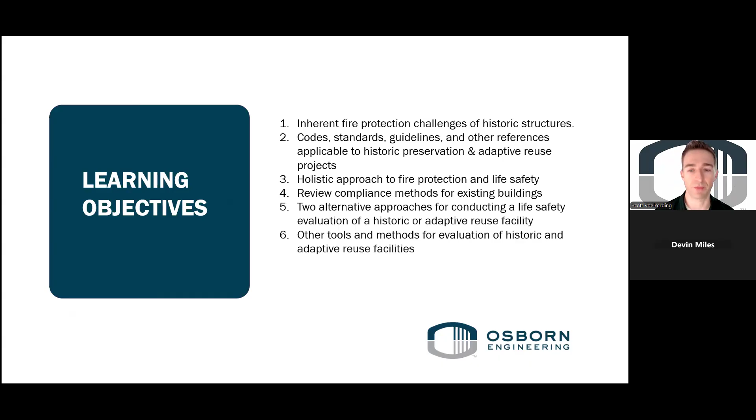So a couple of learning objectives today. We're going to talk about some of the inherent fire protection challenges for historic structures that we don't deal with in other project types. There are many codes, standards, and guidelines that govern the work, and we'll touch on those, as well as how to take a holistic approach to fire protection and life safety and all the different things that go into the level of risk. We're going to review different compliance methods for existing buildings that are largely driven by the building code. We've got a couple case studies to share on how to deploy some of those tools, and then some additional tools we can use beyond the codes and standards as we get into performance-based design and more specialty type services and work.

The inherent fire protection challenges of historic structures: in some cases, these are hard to replace, not only the buildings but the contents inside, and of course preservation of cultural heritage is also a big part of that. But these facilities also have inherent higher fire risk and additional challenges for life safety, due in large part to codes and standards development that lags. We learn a lot of our lessons from fire history, and a lot of times we'll have a big fire and then it'll take 3, 6, 9 years to get those lessons learned into the codes and standards we use for development of the building.

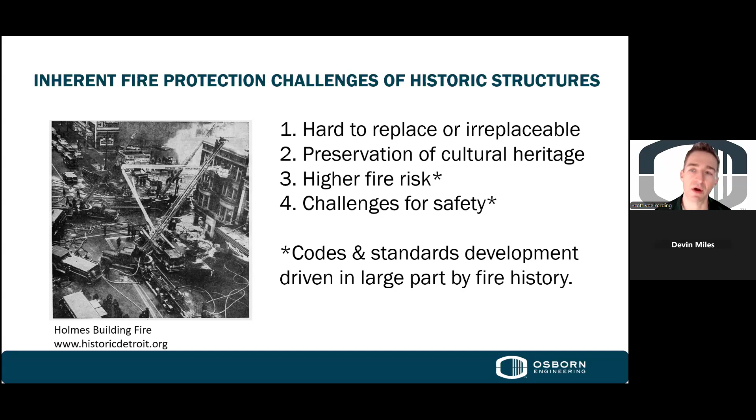So as we're looking at old buildings, whether it's an adaptive reuse project or an old building for a renovation or addition project, we've got to keep in mind that the buildings may have been built 70, 80, 90 years ago when there was little to no codes. Just a brief ICC history: almost all jurisdictions now in the U.S. use some form of the ICC.

There are exceptions to this, but states take those codes and modify them. Most jurisdictions are using a national model-based code, and there were three at one point that were all condensed down into the ICC in the late 90s.

The original International Building Code was published in 2000. The existing building code, which we'll be talking about today, was published in 2003. And these are revised on 3-year cycles.

As I mentioned, states will take those and modify them, and they don't always pick up every cycle. So here in Ohio, we just moved from the 2017 edition up to the 2024 edition, and that's not atypical as you move throughout the country. The modifications to those codes can be significant.

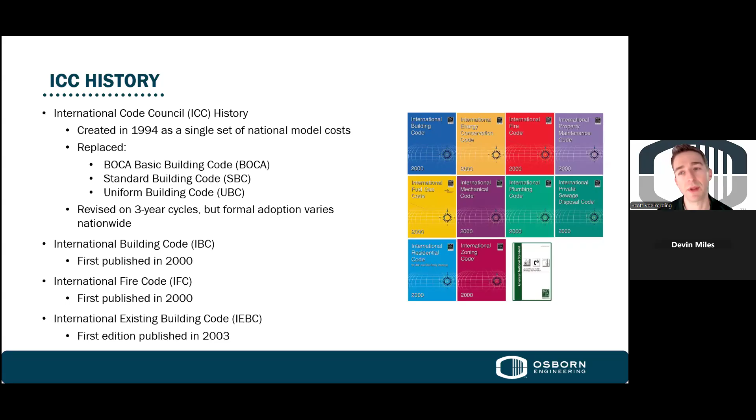So here in Ohio, just a brief review of code history. 1911 is when there was any type of legislature for construction. As we moved into the 50s, they developed the Board of Building Standard, an Ohio building code—not the same Ohio building code that we know today, but one specific to Ohio.

Ohio didn't really get on a national platform until the late 70s, after the OBOA requested that BBS adopt that model building code. In 1979, OBBC finally adopted a version of the BOCA National Building and Mechanical Model Codes. There was a little bit of a grace period to get people adapted, but since the late 70s we have been on these national-based codes.

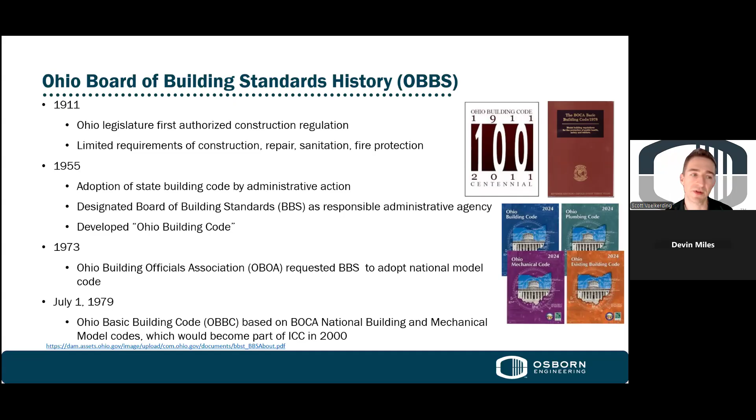But there again, if you're looking at buildings that were built in the 30s, 40s, and 50s, there was very little regulation at the time, and that's inherently part of the problem.

So historic buildings—what is a historic building? The takeaway on this slide is it depends on what code you're in. We're going to be talking a lot about navigating through codes and definitions, and the definitions are important, including that for historic building.

They're going to change depending on not only the code book that you're in, but the jurisdiction, and even sometimes within the code itself. If you're dealing with flood hazard areas, that's going to have a little bit different definition for historic building for that application.

And this has been a problem. I pulled this note out of the NBS from 1976. The NBS was the National Bureau of Standards.

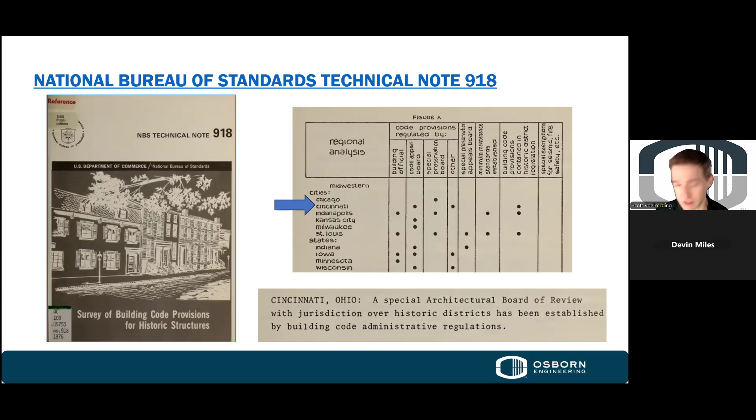Since this is an Ohio-based presentation, I thought it was interesting that in the Midwest, Cincinnati was one of the pioneers for historic building codes—defining historic building and what it means, and adopting and generating some regulations for that.

As I mentioned, the definitions are really important because they're not consistent amongst the codes. Even the ICC definition is taken and modified by the states, and Ohio's done that with many terms. I've just pulled out a couple of the ones that we use relatively regularly that impact the work that we're doing—even things like existing building.

Ohio has tied existing building to a certificate of occupancy, or one that could get a certificate of occupancy. The one that's in the IEBC is broader—an existing building prior to the date of adoption—but Ohio has linked it to a certificate of occupancy or one that could get a certificate of occupancy.

Even things like maintenance and repairs—I was working with a client that had dry systems that were corroding at their facilities across the United States, and a lot of the sprinkler contractors were trying to do entire replacements of these systems as a repair.

So again, these terms are defined by the various building codes and fire codes, and it's really important that we're defining the scope, what it is, and the categorization of the project. We're going to be talking about existing building code, and that becomes critical because that starts to get the roadmap to what chapters govern the scope of your project.

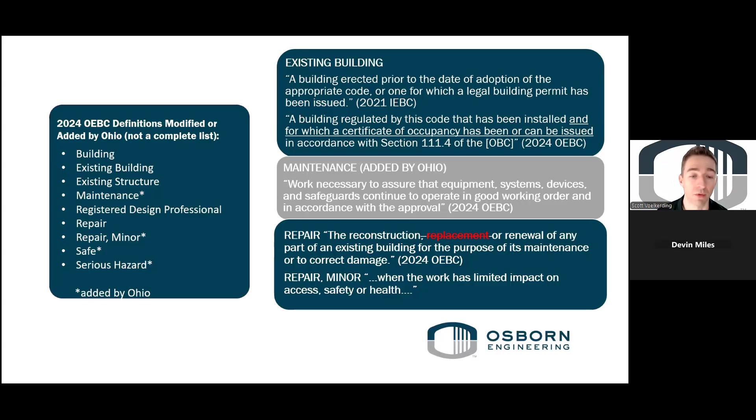On the left side of the screen, I pulled out a couple of definitions that Ohio has either modified, added to, or created, and it's important to familiarize yourselves with those.

In terms of a holistic fire protection approach—a lot of times, certainly in the AE industry, people mention fire protection and they're referring to the sprinkler drawings, which are oftentimes a delegated design and a high-level approach of the sprinklers only. But as we start to look into the codes, and certainly old historic buildings and adaptive reuse, we really want to be mindful that there's a lot more going on to fire protection and the level of risk than whether or not a building has a sprinkler system.

And even though the evidence of fire sprinkler systems is overwhelming in terms of the benefits and the trade-offs, you will see that through the codes and standards, with exceptions and whatnot.

When we're taking a look at a building, either for a change of occupancy, adaptive reuse, or in the case of a historic building, we need to look at all these different systems.

What are they? There's the passive systems, like firewalls, fire doors, and fire stopping. The active systems are the sprinkler and alarm systems, and sometimes smoke control systems for atriums or pressurized stairwells and elevators. These are all active systems that, based on detection of smoke, will turn on and activate.

And then you've got the life safety measures as well that also have to be taken into consideration. A lot of times these fall on the owner side, but emergency evacuation plans, fire safety plans, occupant training, fire drills—we need to look at all those things when looking at the safety of a building.

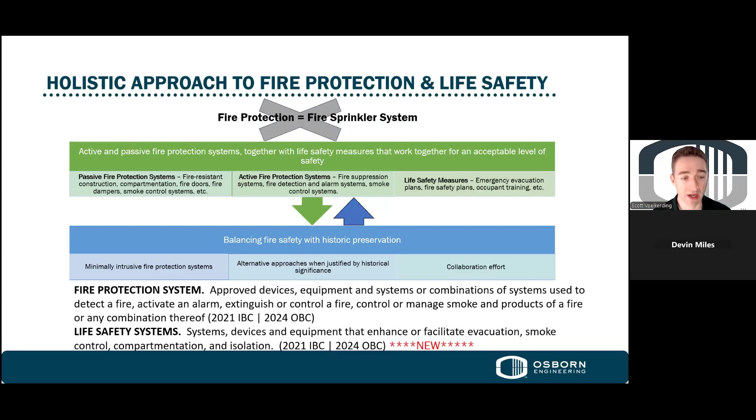Even terms like fire protection and life safety systems are defined by the building code. And it's important to note that, as with the balance, it's much more than a sprinkler or alarm system. There's a lot going on in this, but I think it's important because, as we mentioned, the states will often modify the codes, and Ohio has done that.

Equally important are all the reference standards back in Chapter 35. There's a very frequent mistake made in design: using the wrong book. Part of the problem is NFPA has so many codes and standards—hundreds that are published.

And oftentimes, in fact most of the time, you're not using the most readily available standard, the most recently published standard. The codes are always on a delay, and in Ohio, we just went from 2017 to 2024.

These things are formally adopted at the legislative level. So in this case, we might be looking at NFPA standards that aren't the newest, but these are the ones that are legally applied to the project.

So it is critical on every project that we establish what the model building and fire codes are and all of the reference standards. This is just a snippet on the right-hand side of your screen for NFPA. That list is very long.

There's also ASME. Anytime there's any other standard or reference in the building code, if you flip back to Chapter 35, it will tell you what edition is applicable to the project and also the specific code reference where it's cited, so you can back that up.

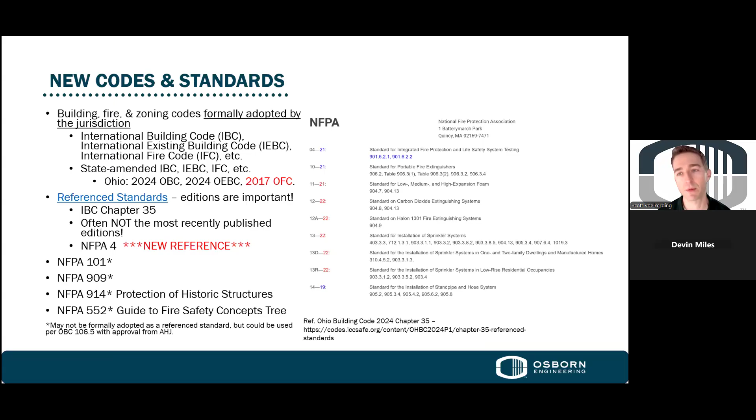NFPA 4 is a big one for us—I've got a slide on that coming up, but that's new to Ohio. And then there's some other codes we'll talk about that might not be a direct reference: NFPA 101, 909, 914 for historic structures. Although those are not formally adopted, I can show you some ways to get to those.

So NFPA 4 has been around for a couple of code cycles. Ohio has finally adopted it. Really, the nature of this standard comes from that holistic approach again.

If you've got a sprinkler system being designed by a plumbing engineer, a fire alarm system by an electrical engineer, and a smoke control system by a mechanical engineer, a lot of times these things do not get integrated and become problematic in the field for testing and construction. The whole point of this standard is to try to get that all worked out with an integrated testing plan.

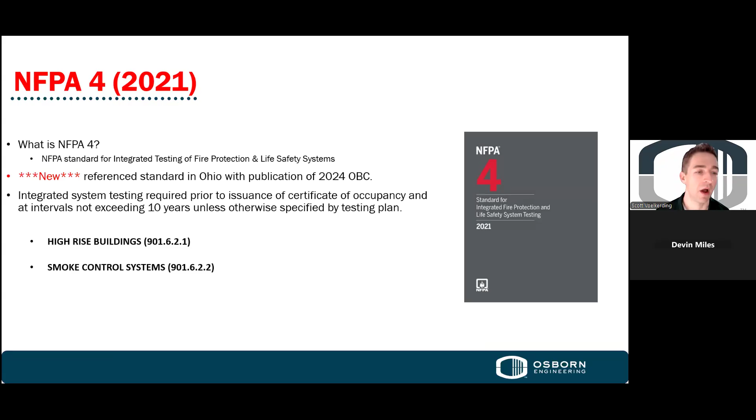At least in this case for high-rise and smoke control systems, all these systems really work together to create the level of safety. The smoke control system is only as good as the detection that's going to turn it on. So that's really kind of at the heart of this standard. Ohio finally adopted the 2021 edition of NFPA 4 for high-rise buildings and smoke control systems.

With the reference standards comes a gap, since Ohio skipped an ICC code cycle. So a lot of these reference standards are going from the 2016 editions all the way up to the 2022 editions, and there's been a lot of changes through NFPA. I'll just highlight a few of the bigger ones.

We've been using air venting valves on wet systems since the 2016 edition. But I bring this up because on historic buildings and older buildings slated for adaptive reuse, some of these things you're not going to find. And if you're replacing a sprinkler system or adding to one, the rules have changed significantly since original construction.

Dry and pre-action systems no longer have requirements for galvanized pipe. In fact, the industry has moved away from that entirely and gone back to black steel pipe, preferably with nitrogen generators. There's been a lot of issues with corrosion in dry and pre-action systems to be aware of. So if you're dealing with an old structure and trying to revamp or replace an existing system, it's really important to look at where the industry has gone, because there might be changes in material type, system type, and design metrics that need to be looked at.

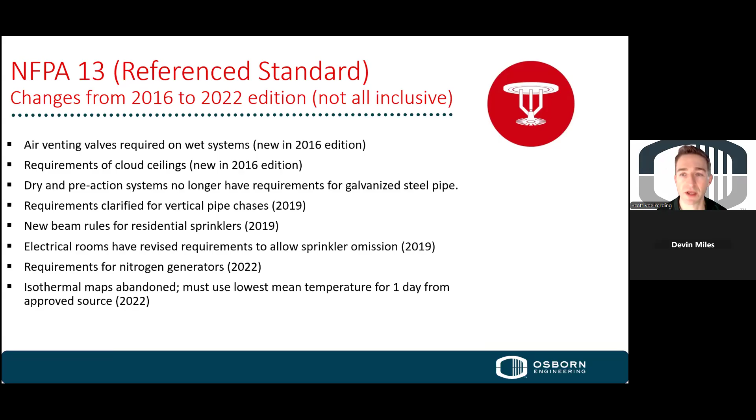Rules for electrical rooms have changed, beam rules too. The isothermal maps have been abandoned, so certainly where Ohio gets freezing temperatures throughout the state, in certain cases when dealing with dry systems, we need to take a look at that as well.

A couple changes from NFPA 20 - it's a big deal whether it's an electric or diesel driven pump. Everything from the fuel hazards associated with the diesel pump to the room space and ventilation requirements. In an older building, you might have a pump that's been around for 40, 50 years that you're going to retrofit or reuse, and the codes have changed immensely.

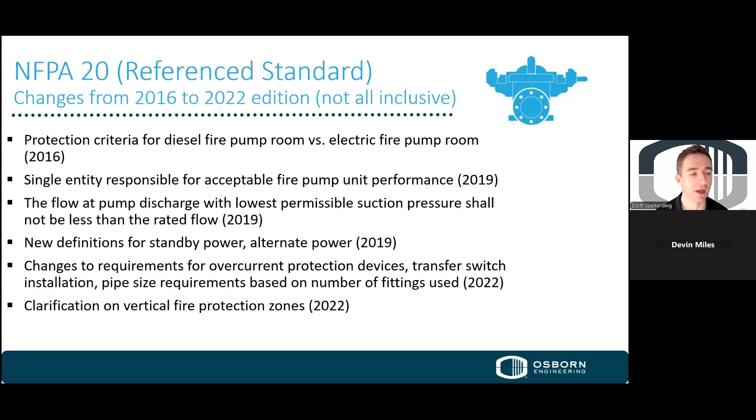A lot of old historic buildings don't even have pump room enclosures anymore, which has become something required in current and recent code cycles. So as we take a look at those pump assemblies, it's not just about the pump. As we get into NFPA 20, it'll talk about the room and everything required for a pump room and water service, and so on. Again, with older buildings, we're dealing with many code cycles of changes.

NFPA 72 has really come a long way just in the last 5 or 10 years. System survivability is a big deal - making sure your wiring and connections with fire alarm systems can sustain a fire, particularly in high-rise or healthcare occupancies. All the terms on system survivability have really come into the code in the last 10 to 15 years or so.

We're starting to talk about elevators and use of those for fire service, and to a lesser extent, occupant evacuation elevators. But with those big design changes in modern day buildings comes a bunch of code changes to make sure we can do that safely.

Areas of refuge requirements, carbon monoxide alarms have been another big topic within the last, I'd say, 5 to 10 years. This is really important with adaptive reuse, because we're changing office buildings to residential. You're always going to get into a requirement in residential now with fuel-fired appliances for carbon monoxide alarms. It just wasn't even a thought even 15, 20 years ago.

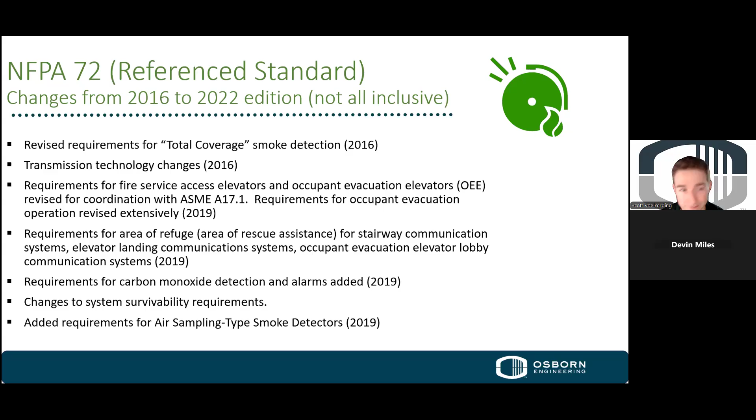Other references and guidelines beyond the codes - this preservation brief 51 is coming up on a year old now. This is an excellent document to navigate historic preservation. I'm not going to deep dive into this because Heritage Ohio has another webinar coming up in a couple weeks focused entirely on that. But if you haven't seen it, that's an excellent preservation brief. There's a whole series of briefs.

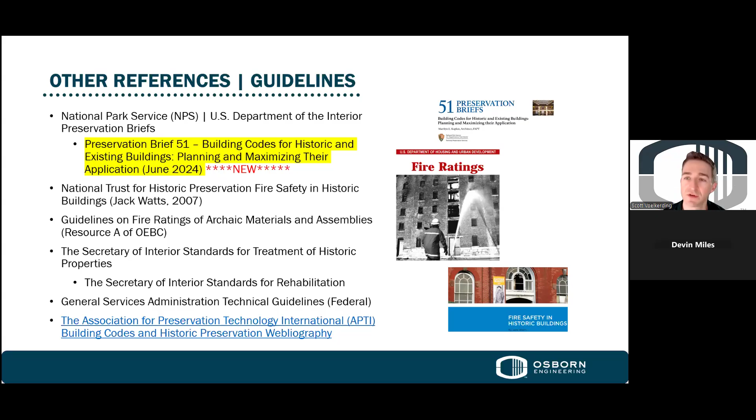They're working on one for wildfires as well. This is really good - you can get lost in the codes very easily if you're not used to working with them. These preservation briefs are written in a way that makes things easier to understand. National Trust has some good literature out there that approaches things a different way - we'll be talking about that in a bit. Secretary of Interior standards, GSA if you're in the federal space has a bunch of standards, and even the APT Webliography.

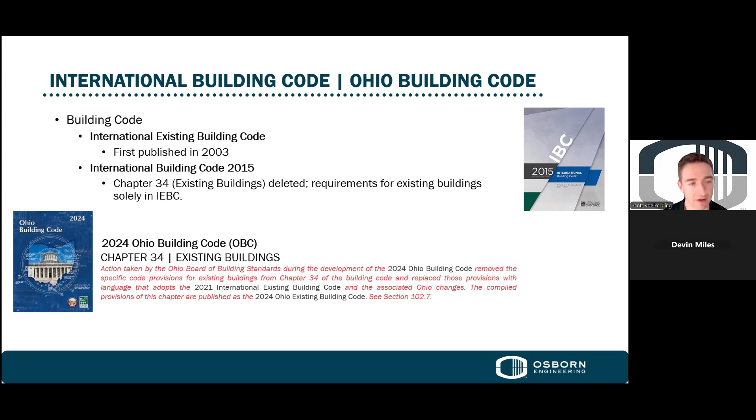So more specifically now in Ohio Building Code, the International Existing Building Code was published in 2003, but Ohio did not pick it up until this last code cycle. It's been a big change because we used to go to Chapter 34 for existing buildings, which is in the building code, which has now been deleted, and everything goes to existing building code. Some of that stuff has been preserved, and we'll talk about some of the performance-based pathways that is not new material, it's been relocated from 34 into the existing building code. But fundamentally, a big change for Ohio, because what was a short chapter is now an entire book of methodologies.

What it comes down to is, at least with the IEBC, there's 3 different compliance methods. One of the things that makes this stand out from other compliance methods is you can only choose one for the scope of your project, and once you pick one, you're kind of stuck with it. It's prescriptive, performance, and work area method. That's not to say if you have a large building broken up into several projects or different floors that you wouldn't be able to choose a compliance method based on those project scopes, but the way this is organized is a one path type organization.

It's worth noting that Ohio deleted an exception that's basically the grandfather rule. That's not to say that you can't—there are other places in the code, prescriptively in the prescriptive method, that allow you, if it's existing and you're not touching it, it can remain. But a lot of the language on that grandfathering stuff has been either reduced or made harder to use, because there's a lot more tools that we have now to be able to navigate some of these design challenges.

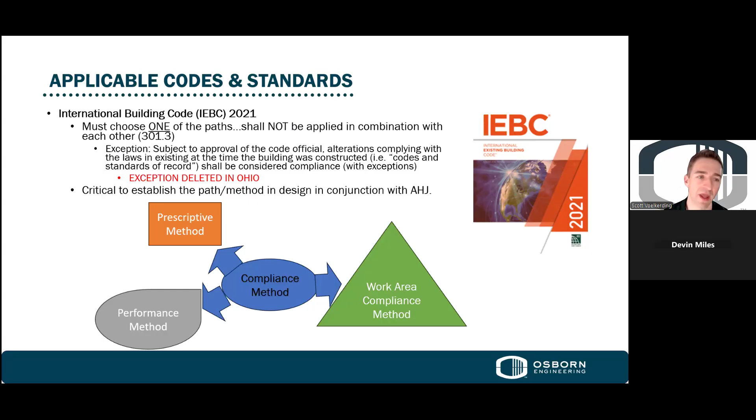So it might be tempting to open up the book, see Chapter 12 as historic buildings, jump right to historic buildings and start looking at project requirements, but that is only good for work area method. In fact, one of the things we're working on at the APT code committee now for this next ICC code cycle is trying to get all the requirements for historic buildings into a single chapter for all the compliance paths. I did just attend the hearings in Orlando a few weeks ago, and it looks like that might have some legs—there's a series of hearings needed to get that passed. Ohio wouldn't see it probably for another 3 to 6 years because we've just gone to this new code last March, but that's something that's in the works.

So as it stands now, your work area method is going to be Chapter 6 through 12, and that's solely the work area method. A change of occupancy is this—this is another one.

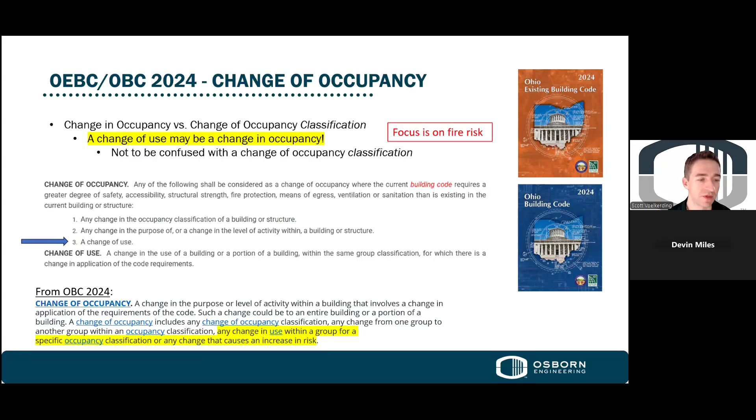It's important to know that a change of use is also a change of occupancy, and really the focus is on fire risk. It used to be that back in the old Chapter 34, well, I've got an A3 occupancy, we're not changing the occupancy classification, we're remaining A3—a lot of this stuff could remain. The existing building code drills down a little further, and we really need to take a look at the fire risk: is that A3 of the same occupant load, or do you still have to take a look at your number of egress doors and your occupant load counts? The focus really on an existing building is more about the change in the fire risk. Even by definition, a change of use is a change of occupancy. And in Ohio, they're calling out that a change of use group within that group, they're looking for the increase in fire risk from an assessment. So it's not as simple as saying, well, we've got a certificate of occupancy for A3, we're remaining A3—you've got to do a little bit deeper dive than that.

So now we're going to kind of walk through existing building codes. Before we do that, are there any questions so far on the code history—why we're doing this, or anything on code development for how we got here so far?

Any questions so far, Devin? Nope, no questions. All right, sounds good.

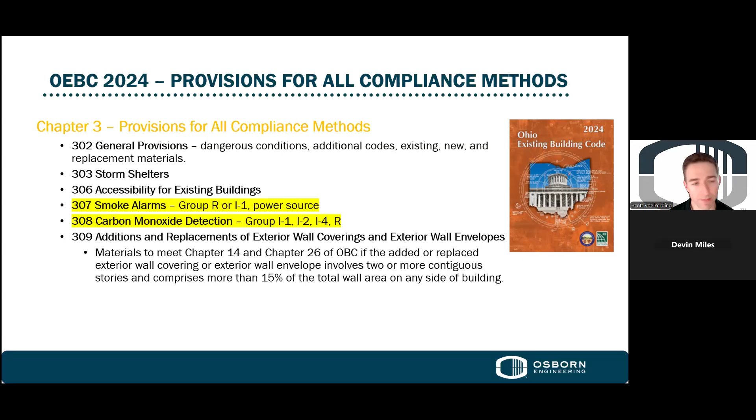We'll launch into provisions for all compliance methods. Again, these are for all the methods. I just highlighted a couple here again, smoke alarms and carbon monoxide detection. These are going to come up on anything that is a Group R or Group I occupancy, and we see that a lot with adaptive reuse with the trend of turning offices into residential. That's going to come up again on all compliance methods, regardless of what you choose.

Prescriptive method is probably the thing that we're most familiar with in Ohio. It's going through and bringing certain building elements up to code based on the nature of the work. But we're first going to categorize that into what we're doing, either as an addition, an alteration, or a change of occupancy. And then there are some exceptions for historic buildings that are covered in this chapter too. You're going to find yourself, if you do prescriptive method, going back to the Ohio Building Code for new installations and the scope of the project.

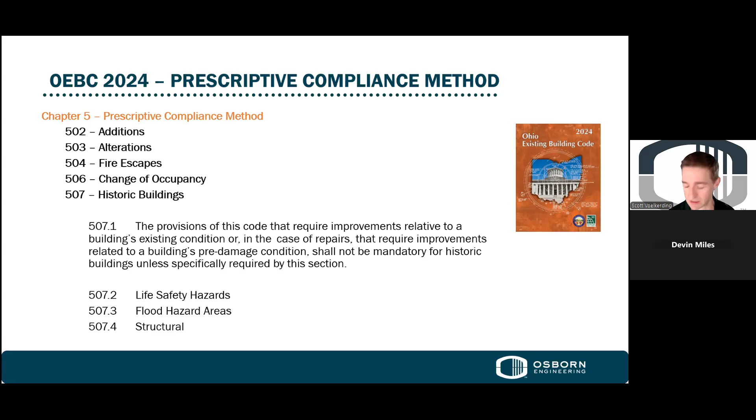Fire escapes, we're still using fire escapes in some cases in older buildings, so there's a chapter on that. This is the one where you'll be most likely sent back to OBC with some exceptions on historic buildings. And there again, the change of occupancy is based on the fire risk.

But within this prescriptive space, there's still some flexibility. So it's not as simple as saying that the existing stairs have to meet codes, and that's really kind of the point of this prescriptive based approach. There's some leniencies in here. I pulled out just a few examples: stairs, where the construction does not allow reduction in pitch or slope. Historic buildings often have a grand staircase that we want to keep, and the codes are going to let us keep that, provide some flexibility. Things on live loads, snow and wind loads, there's some leniency here on the old standards.

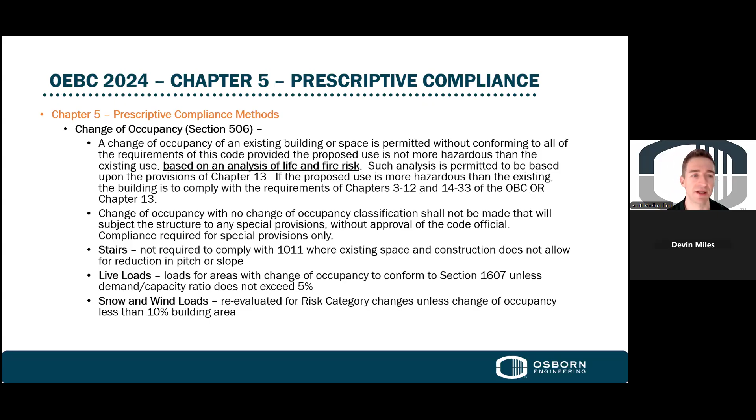There is a provision at the front that kind of guides you through whether or not these are retroactive or not. Not everything in this chapter is retroactive, but there are certain things, means of egress, smoke detectors, carbon monoxide detectors, I've mentioned those before. Those are all retroactive. But we use this regularly in our design work too, because the fire code is going to take over at their certificate of occupancy. It's important to note too that Ohio, while we've gone to 2024 versions of building code, existing building code, we're still in the 2017 edition of Ohio Fire Code.

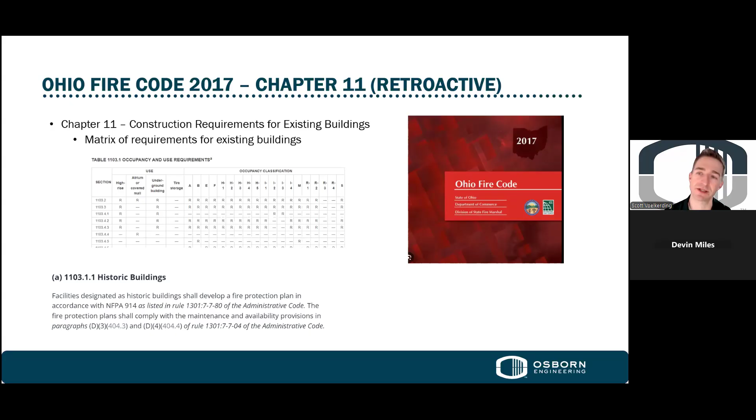And then on historic buildings here, this is one of the paths. I mentioned that NFPA 914 is not a reference standard in either the Ohio Building Code or existing building code, but this is one way you can get to it. The Ohio Fire Code does reference NFPA 914 for historic buildings at 1103.1.1. So that's just one example that I wanted to highlight, just because an NFPA standard is not referenced in the building code, here's a pathway to get to it if you need it.

We're going to shift gears to work area method now. Work area method, you're typically doing work in an isolated part of a building, and you're basically going to draw a box around that, or your work area, and look solely at your scope of work area. You're going to first pick what level alteration it is. Level 1 is more of like a lipstick renovation type of thing, existing materials, elements, and fixtures. Alteration level 2 is when you're replacing doors and windows, or your work area is still less than 50% of the building area. And then level 3 is once you get above 50% of a building area, you're going to comply with level 3. Pretty intuitively there, as you get through the different levels, the scope of the requirements is going to get more stringent with the increasing levels.

And then we can't forget about change of occupancy, and again, change of use. It might also be a change of occupancy, and the code does make the distinction between a change of use and a change of occupancy classification.

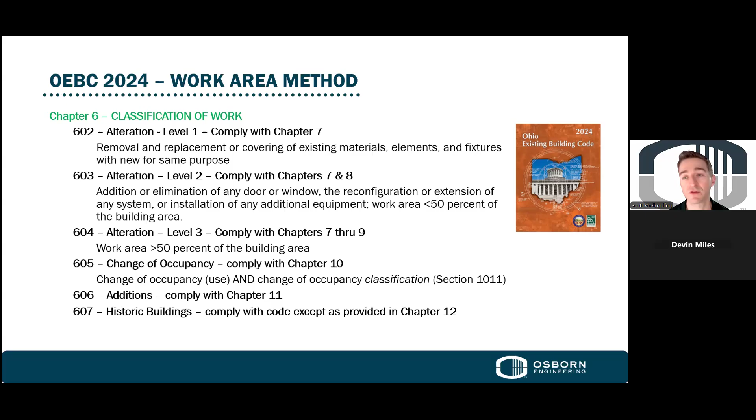And then in historic buildings, this will send you to Chapter 12. Chapter 12 is only for the work area method, and we'll go over some of the different historic preservation provisions of that chapter.

The building official can require a building report. It's implied and accepted that historic buildings are not going to comply with current code, and you'll see that throughout the existing building code in the front end. This written report is just another tool that the AHJ can use as an attempt to have the building looked at, to call out areas that comply and what the compliance method is going to be. It really does encourage an equivalent level of safety - it's not a black or white code compliant solution every time.

There's a dedicated fire safety section, and a provision that lets you use sprinkler systems or fire extinguishing systems to mitigate a serious hazard. The exception is that it can't be a substitute for a number of exits. So if you get a building that requires 2 or 3 exits, you can't put in a sprinkler system and use that as justification for a single exit.

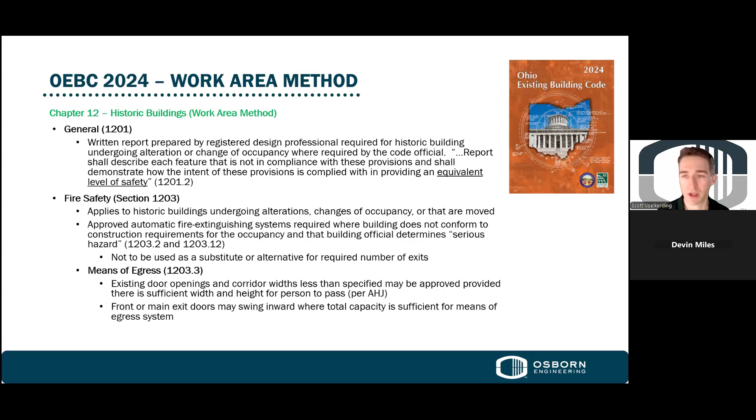But there's some other flexibility as well. Door swings don't have to swing out in historic buildings in some cases, where we're used to doing that now with current code. So there's just some examples of the flexibility provided within historic buildings.

Interior finishes - there's a lot of flexibility there. There's several locations throughout the code that let you use plaster and lath as a substitute, regardless of the fire rating. If the code would require an hour rating and it's plaster and lath, you get a pass for historic buildings. The reason is that there is some fire rating associated in most cases to wood, plaster, and lath - could be as low as 15 minutes and as high as an hour. But again, it's another example of this code providing flexibility to maintain the integrity of the historic building while also making sure the building is safe.

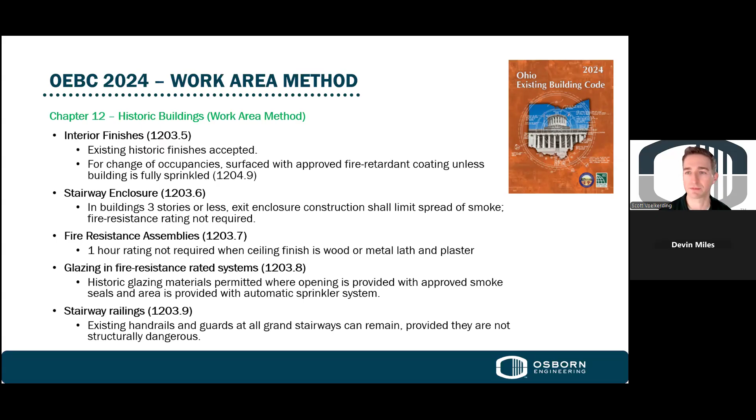Flexibility on stairway enclosures too. We're used to doing 1 or 2 hour rated stairwells, but there's some forgiveness in Chapter 12 there, and for glazing, handrails, guard heights, handrail heights - a lot of flexibility there in historic buildings.

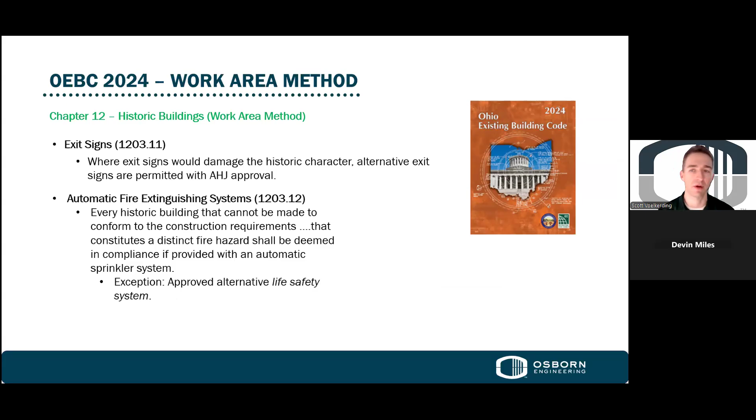Exit signs are the same way - there's a lot of different options for exit signs. Photoluminescent lighting has come into the code as well. And even outside of that, at the floor level and whatnot, there are ways to use exit signage schemes that may not comply with current code, but there's some flexibility for historic buildings.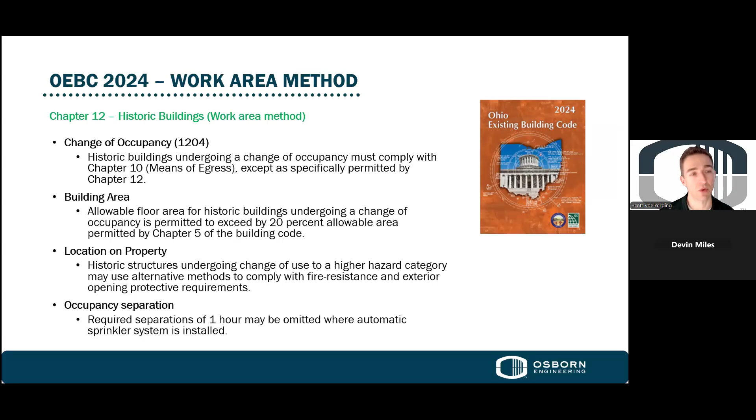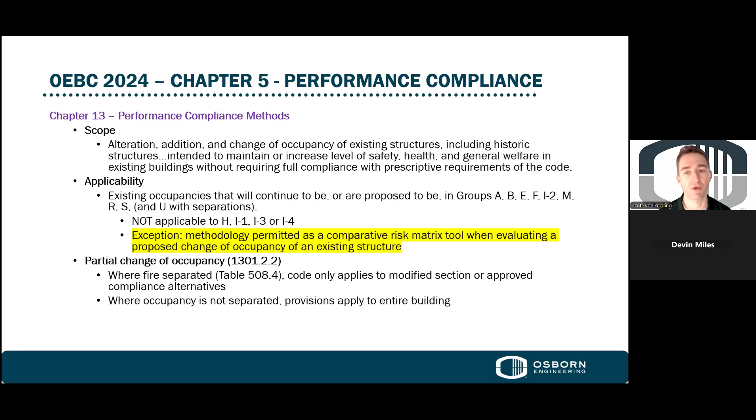We're going to move to the performance compliance method now, and this is the path that's least prescriptive. There is a tool we'll talk about here for evaluating the level of risk in existing buildings, and this can be used whether there's a partial change of occupancy or a total change of occupancy. It's got pretty good application. There are some occupancies, like high hazard for example, and certain I occupancies, that this would not be a path for, but this is a good path for a lot of places.

Now, this is just one example of a performance compliance method. This used to be in Chapter 34 of the building code, and this system was developed in Ohio back in the 80s, so it's been around for a while. They took it out of Chapter 34 and put it in the existing building code. Again, it has broad application, and in this case you could still use it for I2 - it's just that if you use it for an I2 occupancy, you have to apply it for each smoke compartment.

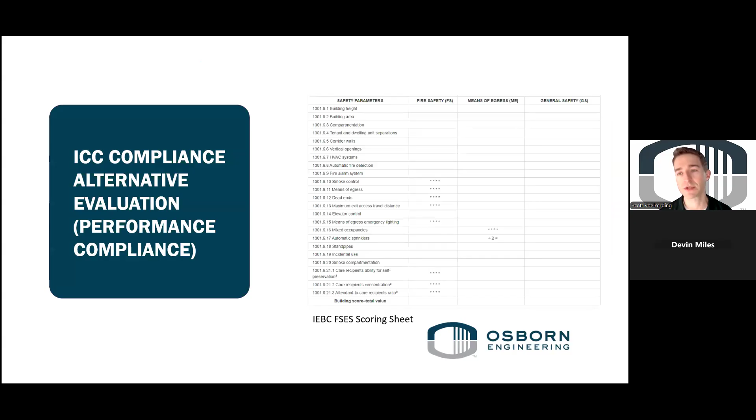The basis of this system is to take a look at 3 different categories: fire safety, means of egress, and general safety. We have to make sure we have a minimum level of safety provided in all of these categories. Here's just a snippet of the scoring sheet - there's 23 categories on here, and then subcategories under fire safety, means of egress. We're going to look at all of these components of the building, add up the scores, and find out if the building complies or not.

One of the nice things about this method is if you run it as is in the building and fail the test, you can go back and see what you can do to pick up points. I've pulled out a couple examples of that, because automatic fire detection is a place where you can pick up a lot of points, where we've used and deployed the system before. If you look at an A2 assembly occupancy, the difference between not having any detection at category A of -25 and category E, smoke detectors throughout your floor area, there's a 34-point differential you can pick up just by adding detection.

Detection is generally not intrusive and fairly low cost compared to other means and methods in fire protection and life safety systems. So just with detection alone, you can pick up a lot of points and make your building safer. The idea is that the fire alarm rings sooner, you start your means of egress sooner, and the building is safer because you're alerting occupants sooner and starting all those pathways sooner.

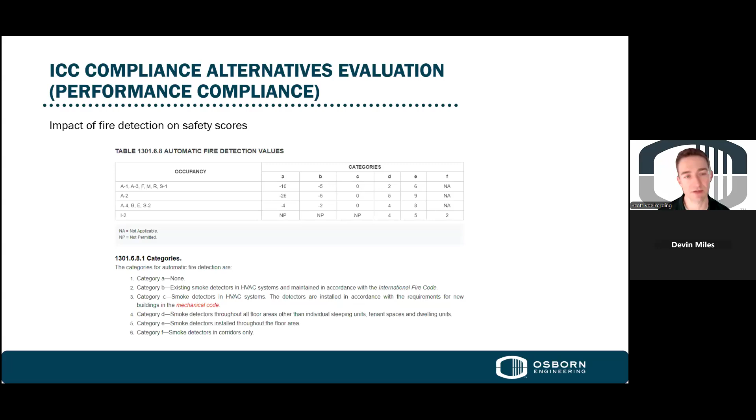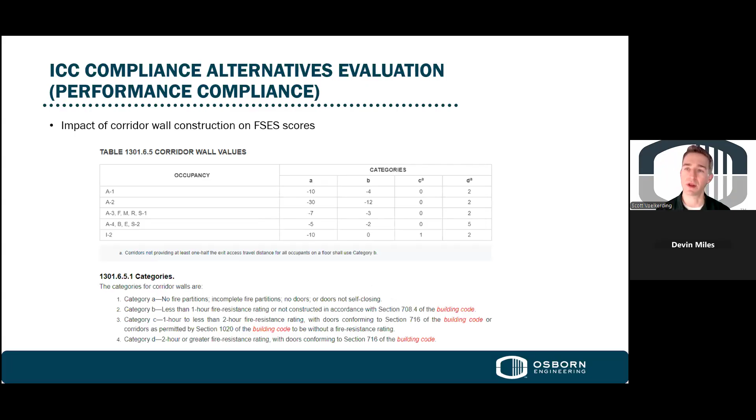So there's some flexibility on what needs to be provided. Corridor wall values are another example. The difference between having no corridor walls and an A2 occupancy in this case is -30, and up on the other end, 2 hours gives you 32 points. But we're going to do this with all the different 23 categories and go through to try to pick up enough points to demonstrate that we have a safe building.

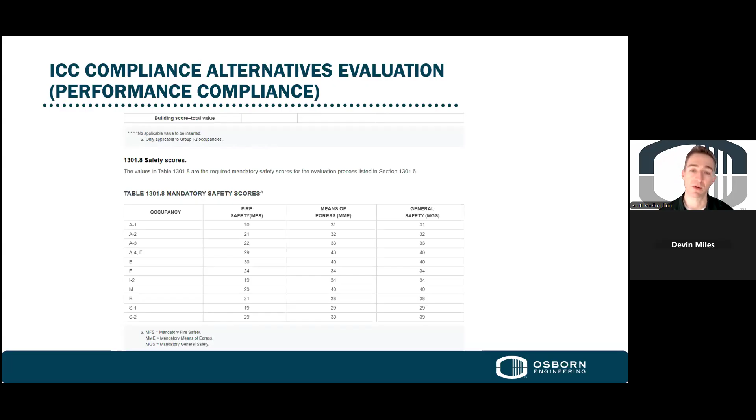The code is going to dictate what those minimum scores are for fire safety, means of egress, and general safety, by occupancy. Obviously there are occupancies that are more hazardous, either by occupant load or people sleeping, etc., so they've spelled all that out. We add up the points and make sure we meet the minimum scores in all three categories. If we don't, we take another look and try to develop a design or approach that has a passing score in all the categories.

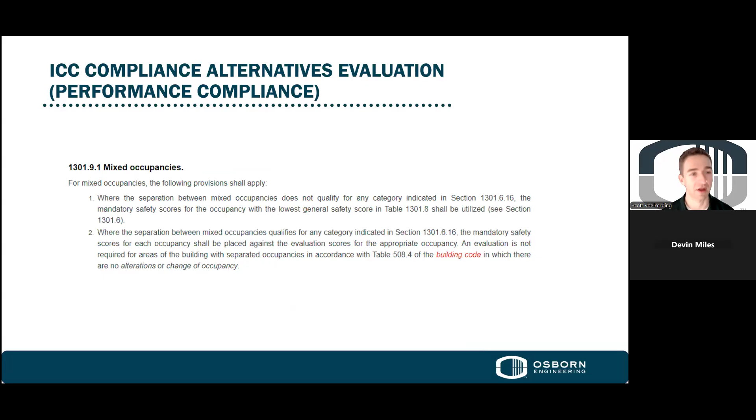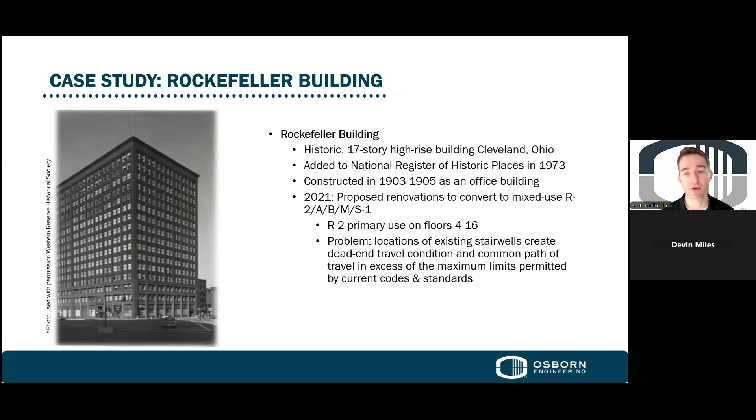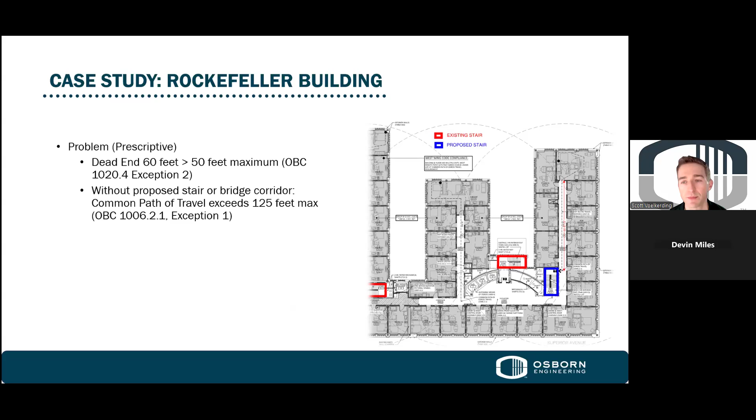So we'll walk through a brief case study. This was a building in Cleveland, the Rockefeller Building, a 17-story high-rise. It was an office building being converted to an R2. The problem was that the locations of the existing stairwell created a common path of travel problem and a dead end problem on the right side of the screen. The left corridor, even though longer, did not have that same problem because of how the exits were situated. The blue stair in the bottom right corner was the architect's original design—they were going to cut a new stair into the building to meet all the travel distance and common path of travel requirements. That's one option we looked at.

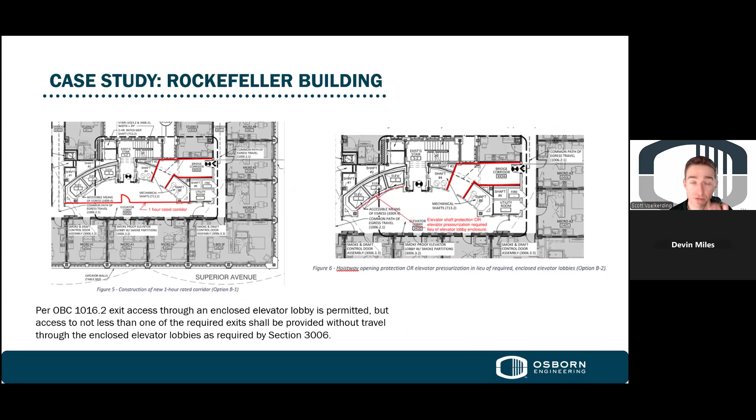We looked at more of a horizontal bridge corridor instead of a vertical stairway, putting people into the lobby. We also looked at putting a corridor through the elevator lobby, because where a building is required to have two means of egress, only one can go through an elevator lobby. So we looked at both smoke guards for the elevator shaft and a rated corridor as options. We ran all the numbers and found that basically all three of those paths created a path to compliance.

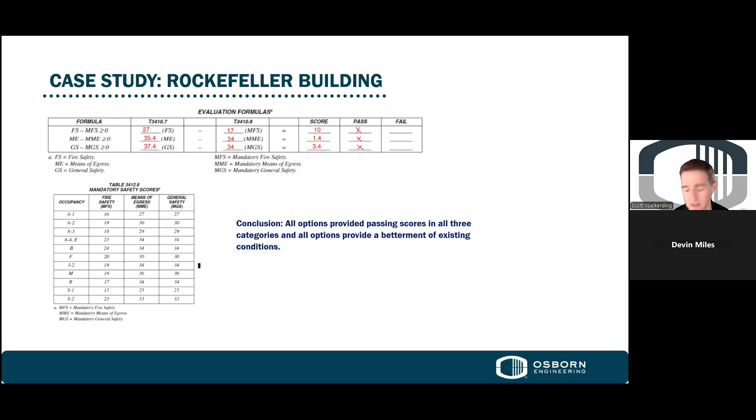We had some additional detection in there, again going back to picking up points to get the safety scores. All three options gave the architectural team some options for design and a compliant building, even though under a prescriptive method it looks like you might have a dead end or common path of travel problem. Even in that case, detection can go a long way to mitigating those problems because you're starting the alert and means of egress sooner.

I have another example here on NFPA 101A. The reason is because this is organized very differently—similar approach to the point system, but the way they go about occupancies is different, so I wanted to run through a quick example. In this case, we had a board and care occupancy where NFPA 101A was just better suited for the project than NFPA 101, or the existing building code performance method, because of the specific chapter on board and care and how they treat board and care.

So we had a small facility, Sisters of the Holy Spirit Mother House. This was in Garfield Heights, Ohio. It was an old nunnery that was being converted to mixed use new board and care.

And 101A is the assessment. We're able to get to 101A through chapter 1 of the building code, which allows alternative compliance methods. Our justification was that this system is similar to Ohio, at the time chapter 34, similar to the method but more appropriate for the occupancy for board and care. They also had a fire at this facility back in the 40s, so there was some sensitivities there.

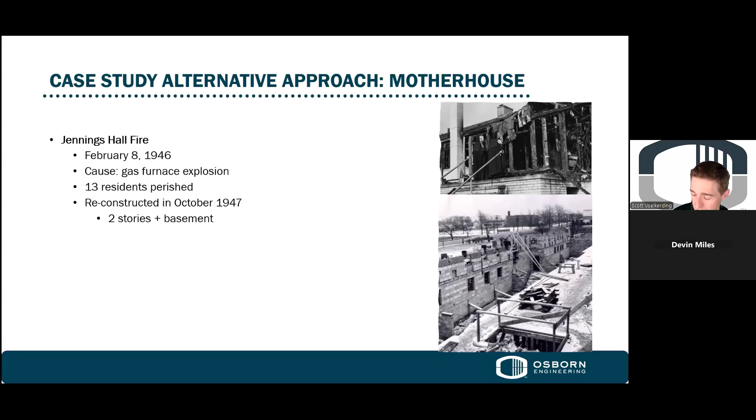With the change of occupancy and the adaptive reuse of the building, this is also unique to 101A. They divide board and care into large and small facilities, which was perfect for this job because the second floor had 16 residents, the bottom floor had 16 residents or less, and there was a 2-hour fire separation at the floor. So we were able to treat these as two separate small facilities, which was required even in the OEBC, similar to healthcare, where you've got to run the analysis for each smoke zone.

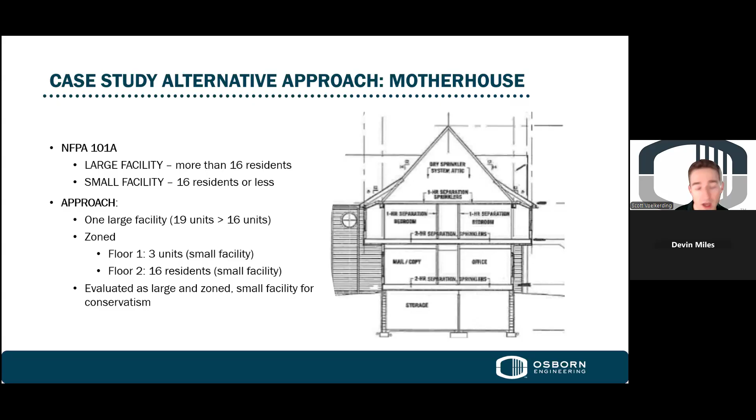We ran it all ways as well. We also did a large facility analysis, 19 units. Again, the big takeaway here is very similar in scope. There's less categories to evaluate, but they just get to the safety scores a different way.

Similar approach. There's an additional worksheet with this one that we can't overlook. There's certain things like utilities, heating and ventilation, elevators that need to comply. And then there are things like we talked about at the onset of this - fire drills and operational things that for the design professionals on the call, we need to work with our owners to make sure there's a plan in place.

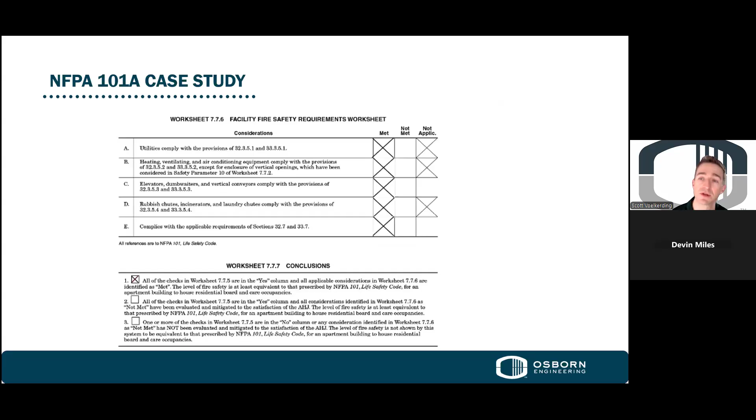And for the owners on the call, that's also an important part of fire safety - making sure that you've got your fire evacuation plans and you're doing your testing and whatnot, and working with your local fire marshal on that.

So the case study conclusion - again, it passed. It was just a couple points shy of the new large facility, but with the 2-hour fire separation and the way the building was arranged, we were able to show that it maintained equivalent compliance.

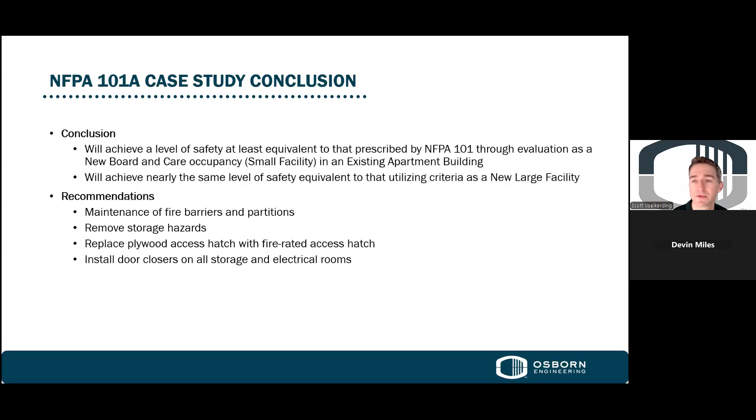And there's always going to be some recommendations. It's unlikely that you run an analysis and have nothing to do. In this case, there was a plywood access hatch that needed to be dealt with, and they had a storage hazard in the basement with rack storage that had to come out. So you're likely going to have to do something, even with these performance-based approaches, but it was a compliance path that we were able to get to with 101A.

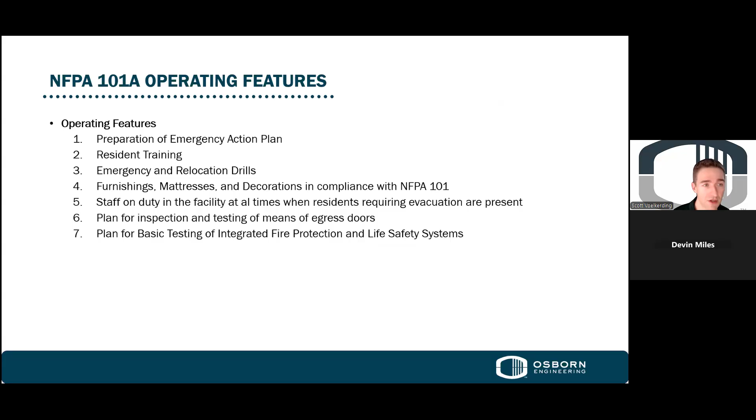And here's some of these operating features as well, whether you're an owner or a design professional. A lot of times in the design part, we don't get into these specifically, but it's important that we work with our clients and owners to make sure there are things addressed from the operating feature standpoint. I'm just going to spend a few minutes on NFPA 914 because it's similar but different.

So here, the goals are the same - the occupants, the contents, protect physical structure. There's also a focus on resiliency, which can be a big topic for historic buildings. We might only have one of a historic building, and the plans for resiliency become even more important.

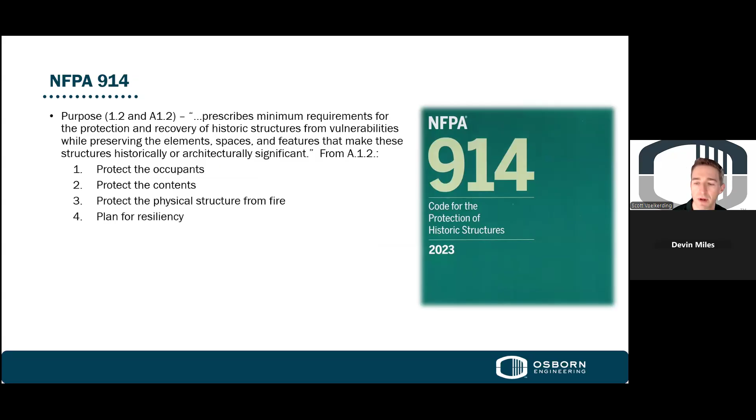But what's really different about this, even though the objectives are the same and the historic preservation goals are the same, is you are allowed to use a combination here. In the OEBC, once you picked your compliance path, you were stuck. Even by design and prescription here, a combination of these methods is permissible.

This is also the less code-like. The OBC and even the OEBC is structured as a code. This one doesn't read as much like a code, and it's why it falls under performance. It's more about creating a safe plan for your building that covers all the things - height and area, fire suppression systems, compartmentation, and the operating features. It's all being addressed, but it's more on a case-by-case basis than it is a prescriptive code.

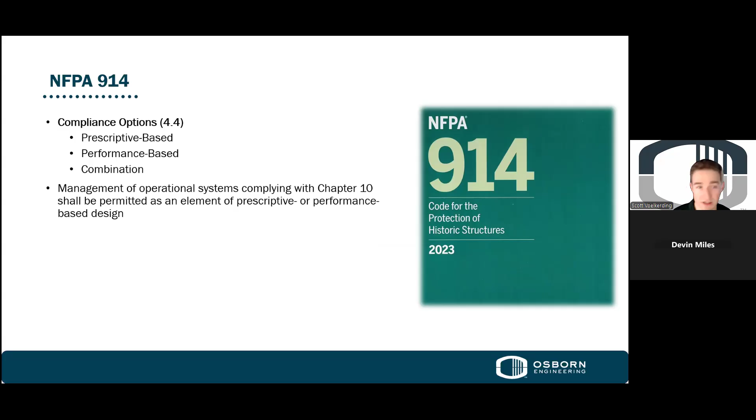And equivalencies are also encouraged in 914 as well. But it's not a design handbook, and in some cases, it's like I said, it's the least code-like.

When we get into performance-based design and start talking about fire modeling and other tools we have to use, this is a good tool for developing design fire scenarios. When you start talking about fire modeling as a path, the output's only as good as the input.

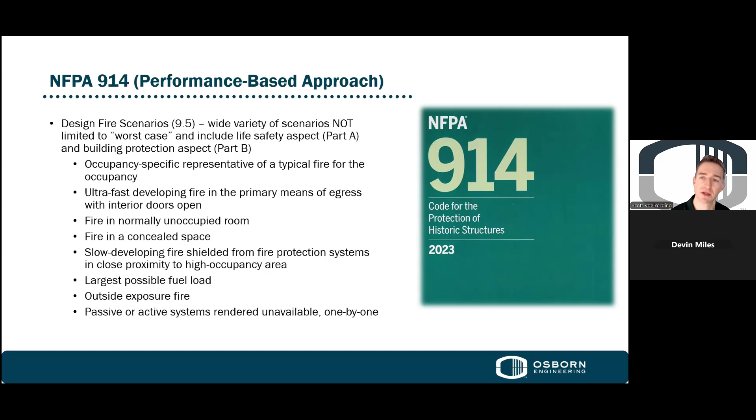So what you choose for a design fire scenario is critical in those cases, and there's a lot of guidance on how to do that. The example I always like to use is a Christmas tree in an atrium - that might not be present all year long, but as you're looking at different design fire scenarios, you're trying to choose a reasonable design scenario that is going to be the basis of the modeling study. There's a lot more documentation for this, but that's how this is structured.

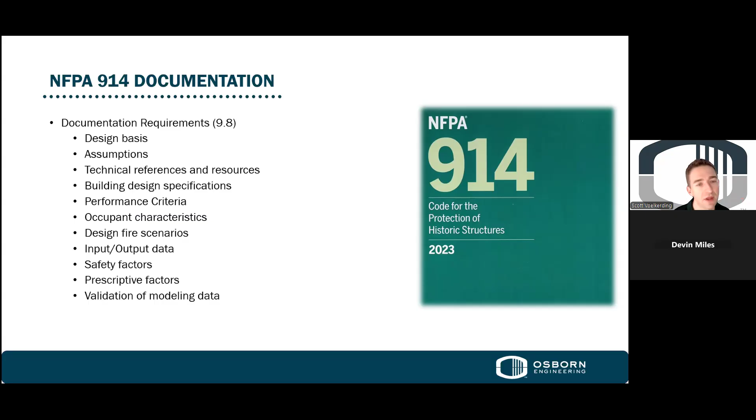And we already covered the part in OEBC where you have to do a report as requested by the AHJ, so this is already kind of built in there. This is a case where you put together more of a report that would get submitted with the construction documents to highlight a path to compliance.

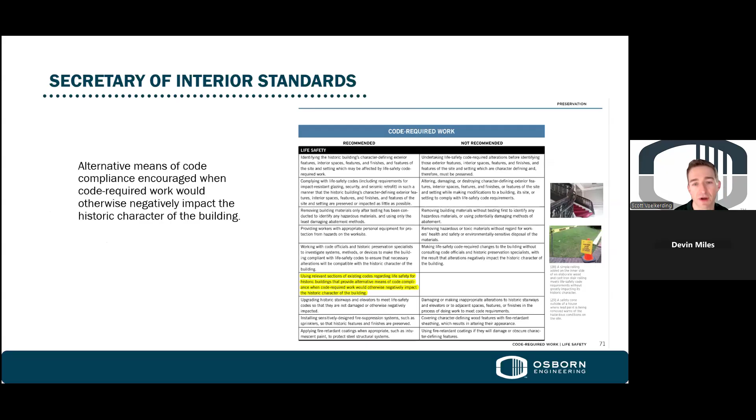There's a lot of good stuff in the annex of the NFPA standards as well that are sometimes overlooked. In this case, for historic preservation, there are examples of compliance alternatives, different assessment methods, and some code exceptions. The Secretary of Interior Standards also encourages, again, we're going for that balance, and in their standards they encourage alternative means of code compliance for historic preservation.

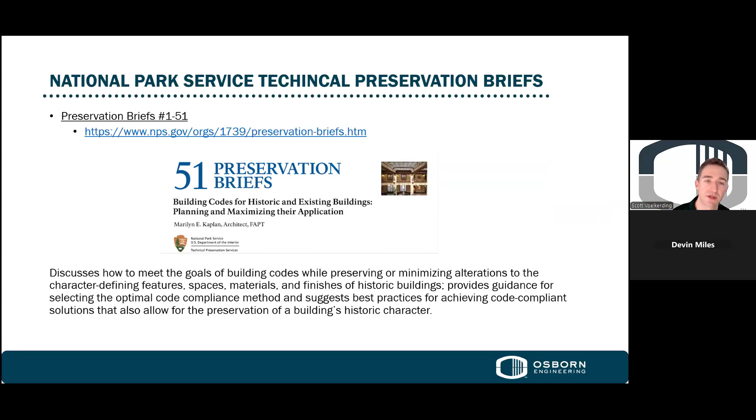So I mentioned there'll be a separate webinar coming up through the Heritage Ohio on Preservation Brief 51. This is one of 51 briefs, well worth checking out, as well as some resources. The National Trust has some resources as well, and this goes about things a little bit differently.

It starts to get into different fire suppression types - water-based, non-water-based, conventional, high-pressure mist. Mist systems really haven't taken off that much in the United States as much as they have in Europe, but there is a path, especially with everything happening now with the PFAS problem, and people pulling foam systems and clean agent systems out. There could be a path for water mist more prevalently here in the United States.

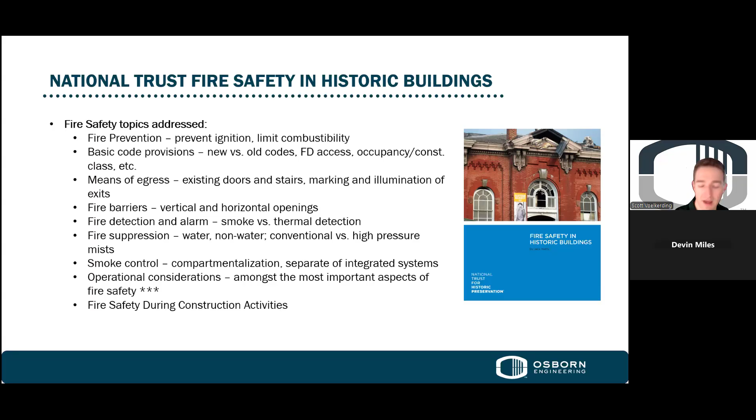This talks about things even like fire preventing ignition and limiting combustibility - again, not as much code-like as it is a guideline. There are different design tools and approaches that you have too when working with historic buildings.

Design by MEP is an approach. That's probably the one that's most commonly used, and it works for a lot of cases where it's largely delegated design to suppression alarm contractors. But as the building gets more complex and has more complex issues - and again, this is where NFPA 4 comes in - there are some other options to deal with that.

You can still do delegated design by incorporating a fire protection or life safety specialist in the design team. You could do design by contractor. And then there's code minimum versus other things too.

A lot of times what you're going to get with delegated design by MEP is some of the bare code minimum on projects, which might work really, really well for some project types. I think with historic buildings and adaptive reuse, there's a lot of different code compliance issues.

Also, as I mentioned before, the material types and types of systems that we use with sprinkler systems, and the galvanized pipe and black steel pipe issues - there's a lot of different issues to uncover in a historic building, and we all want to make sure that they are working together.

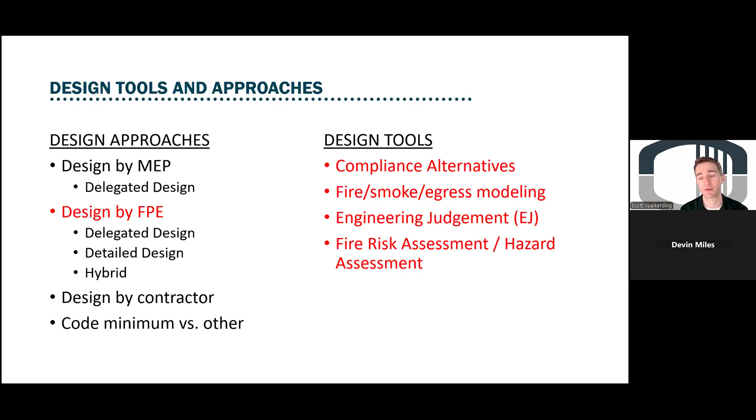Then on the performance-based side, fire, smoke, and egress modeling - we do a lot of engineering judgments, but particularly for older buildings where there's an older assembly that might not quite fit into a UL design standard. How can we do an engineering judgment to figure out what this rating is, using both what the code allows us to do with some of the permissions and assign a rating on that assembly. And then, fire risk hazard assessments at a larger scale.

Briefly, with fire modeling tools, on some of the simple models you might be able to just say you've got a 4-story box atrium - hand calculations might work in that case. But as soon as you get out of a box atrium, or start to get up into taller buildings, you really need to get away from those. There's criteria that go with those documents that the engineer should know, but it's not as simple - those have their time and their place.

The hand calcs work for very simple box type buildings. You start getting into more complicated geometries, things like outdoor and indoor temperature, stack effect. There's a whole list of things that have to be looked at as you get into higher buildings. Those factors become more prevalent, and in some cases require fire modeling, and there's different programs to be able to do that.

CONTAM is what we use often for stair and elevator pressurization. That's much more simple to operate than some of the FDS models. When I first started in this business more than 20 years ago, we would have a desktop computer that would run some of these CFD models for days at a time. 20 some years later, those same kinds of things are done within hours or minutes, just with the computing power and the technology. So these tools have really come a long way.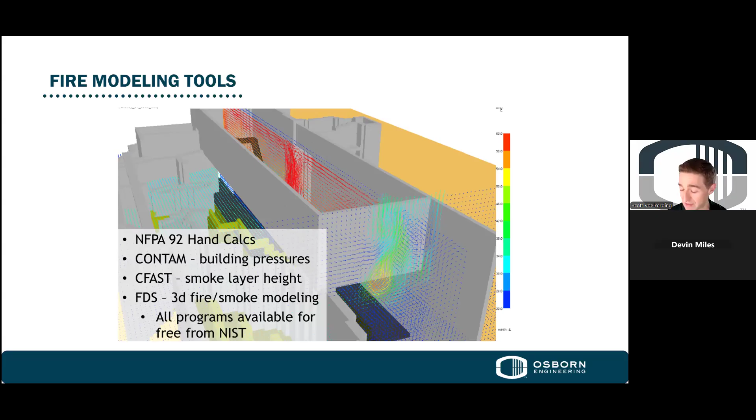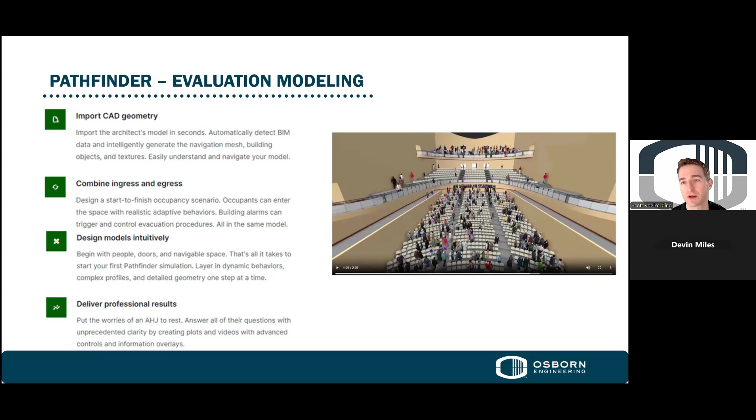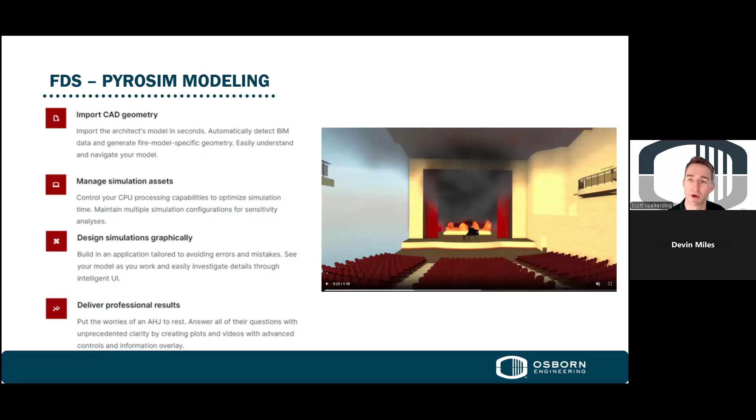These are modern tools that we didn't really have access to as readily 10, 20 years ago. Even things like theaters, we can model with BIM now, model a specific project, figure out how long it's going to take to evacuate a space, whether it's a theater or any occupancy. At the same time, we're taking a look at fire growth, in this case a stage, how fast the fire is growing, and the toxicity of the smoke, heat, and gases, doing those things simultaneously. Can we evacuate the occupants before the fire gets to a point where it's no longer tenable?

Other tools include heat transfer analysis, timed egress, fire resistance. We have a lot more modern day tools now than we did just a few years ago.

I pulled this out - I'm registered in the state of Texas - more as a summary, because a lot of times, particularly with older and historic buildings, it might be tempting to want to go sit with the building official and ask them what they want to see. But over the years, the projects that really go best, and even from a roles and responsibility standpoint, for the design professionals on the call, including myself, we're being hired by the owners and the clients to prepare the plans and the different options and solutions to then present to the building department to review and approve.

For the owners on the call, that's in your best interest to make sure that the design professionals you hire are doing that work.

Texas put out this brief, looks like last year or so, because this has become such a problem where designers were going into their offices - and this is not just a Texas problem, which is why I wanted to pull it into this presentation - about design professionals going in there and using basically the code review authority as either a quality check or to let them drive the design process.

This becomes even more exacerbated and important on historic buildings and those for adaptive reuse. There are some complicated design issues that we need to navigate. For the design professionals, we need to come up with a solution and work together on those and present them to the AHJ. It's the AHJ's responsibility to approve them, and of course the owner of the building is part of that process as well.

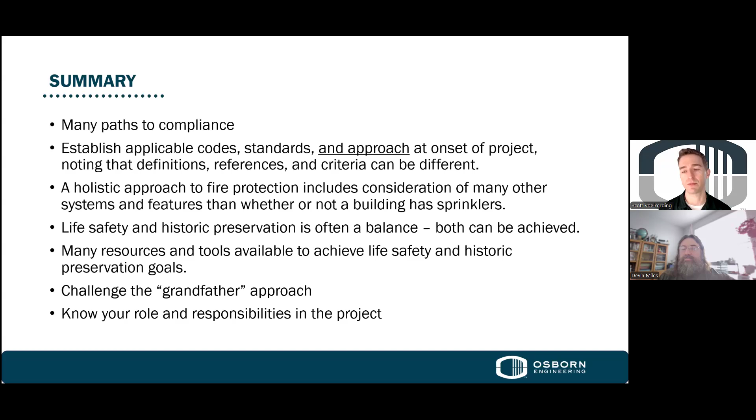But those are some of the issues, and fire compartmentation—there's going to be a trade-off there. In some cases, going to assembly might be easier; you might have less fire-rated construction. In some cases it might be harder because assembly occupancies generally have more people and more exits, et cetera. So all that can be fleshed out in a study before you get too far down the line of plans and meetings. Thanks, Scott.

Next question: is there a publication which identifies archaic assemblies to determine existing old school floor, wall, ceiling assemblies? Yes, I skipped over that—I had a bullet in there. I think it's Resource A of the Ohio Existing Building Code. You can find this in a bunch of different places too, but it's actually been picked up in this last Ohio Existing Building Code. I think it's Resource A—it starts with Appendix A, so you've got to get down a little further, but it's the archaic materials section.

Get the formal name of it, but I would check the Ohio Building Code, Ohio Existing Building Code 2024 resource.

Thanks, Scott. Next question: we often encounter small building owners, historic building owners, who have had a visit from the local fire marshal and have those kinds of questions. What can people be doing now before they get those visits to start working on their fire protection systems, with a budget-conscious mindset?